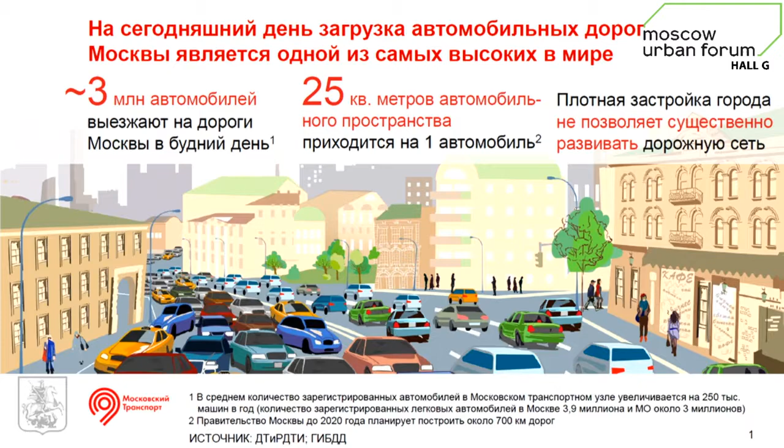And we have 3.9 million registered cars in Moscow. In addition, in Moscow region, we have 3 million cars registered. And we need to sum up these indicators, because we have a kind of unified transportation agglomeration. So I believe we have around 7 million private cars. We are not talking about trucks and lorries. And these are the cars which travel along Moscow streets every day. And this is an issue which we can resolve only jointly. This year, the number of private cars increased by another 250,000, and I believe that in the crisis period, the number of cars will not become less. People continue buying cars, and by the year 2020, we will have another 1.5 million cars in this city. And probably you are aware of the opinion of certain experts.

500,000 cars can be a comfortable limit for Moscow. If we have 500,000 cars on the streets, it will be quite good. Currently we have around 3 million cars, and 7 million private cars are registered in Moscow, and we will add another 1.5 million cars which will be purchased by Muscovites in the coming years.

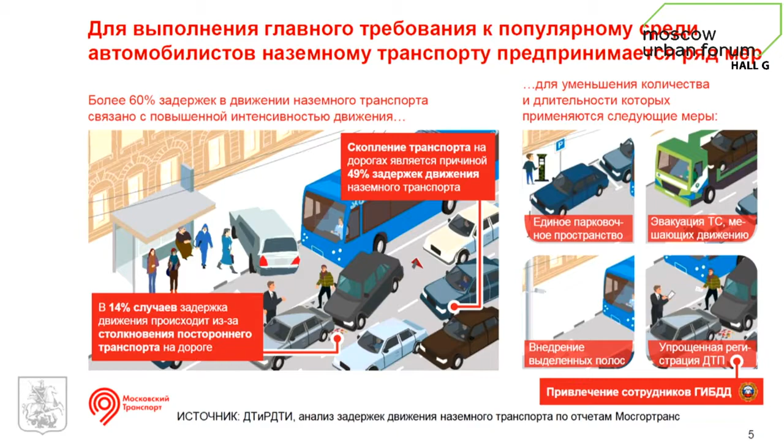Now we are trying to introduce a European protocol for resolving these accidents, but still only 1% of motorists use these protocols, and therefore we need to state it is not that popular, or it is not feasible probably, and our goal is to make it more commonly used.

So what measures are we taking to make public transportation work better and to alleviate the life of our motorists? We arranged what we call a unified parking area and dedicated lanes on roads, simplified registration of traffic accidents, and attracting the public, the traffic police, quicker to the place of an accident.

And now I would like to speak about some additional efforts which we are going to undertake: optimizing or streamlining the traffic network, introducing a rapid bus system, and future development of parking lots and parking areas in Moscow.

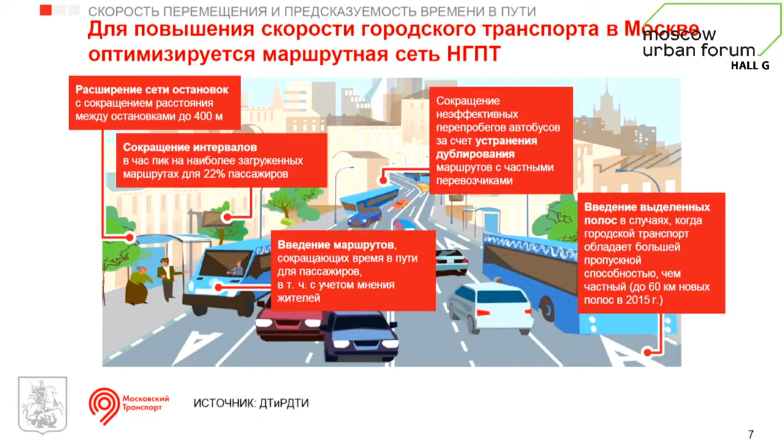What will be the benefit for the passenger? There will be more traffic stops, each of the stops will be longer on the roads, up to 400 meters, and the intervals between public transportation buses will be shortened. The same concerns streetcars or tramways.

We will remove this duplication of routes. We will introduce 60 kilometers of dedicated lanes for buses, in addition to the 15 kilometers we have now.

And we will continuously, daily improve the route system in response to the needs of the population, by their request.

We will have a unified city ticket, and there will be no other tariffs or rates of other prices. We will not have the route minibuses which are completely disorganized these days.

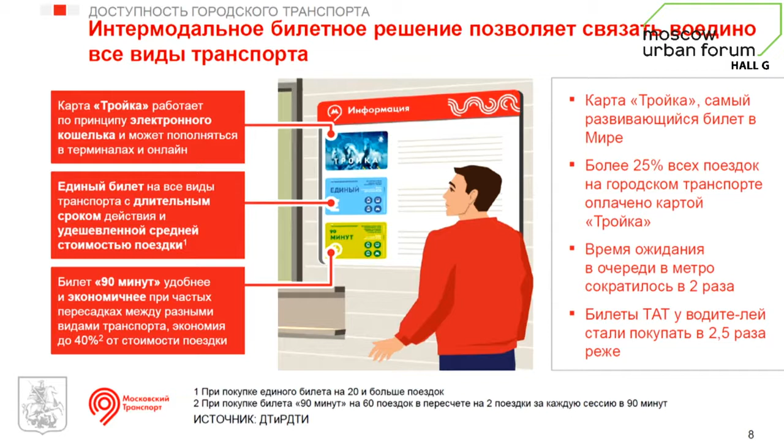These are our ticket solutions. As I said, our Troika transportation card is the most quickly developing ticket system in the world. We introduced it quite recently, and 25% of all trips on public transportation, 4 million rides, are paid by these Troika cards. By introducing this intermodal ticket, the number of lines reduced 2 times, and people buy much fewer tickets these days.

We also did our best to constrain the growth of prices on public transportation tickets. The mayor was very consistent there, and it will not exceed inflation. This is the commitment of the mayor of the city, so nobody should expect that one day prices will just skyrocket.

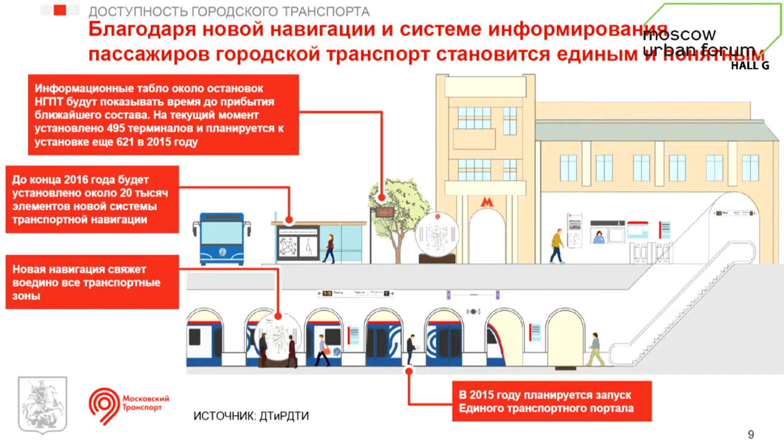Another thing to talk about is city navigation. Thanks to companies like Yandex and others which develop our signage system, city navigation has become transparent and easy. We have 495 displays in the city which indicate the time remaining to the next bus or tramway.

Another 600 displays will also be erected at the bus stops, and this makes life much easier. We will have more than 20,000 elements of transport navigation installed across the city next year.

In 2015, at the very beginning of the year, we will launch a unified transportation portal where we will have all services available, and it will also be a very good platform for communication for Muscovites on issues of public transportation.

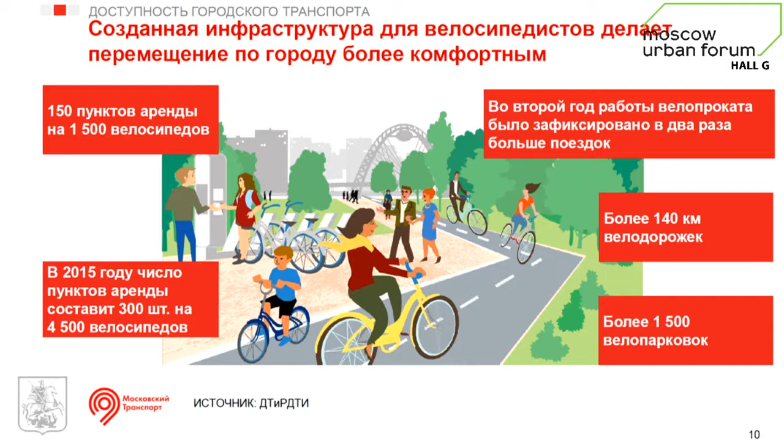As for bicycles, last year we started paid bicycle rides in Moscow, and the number of city bicycles increased in 6 months by 200%. We also increased the number of renting places, and thanks to development of bicycle lanes and the efforts of the Moscow government, bicycles gained in popularity and the attitude of people has changed.

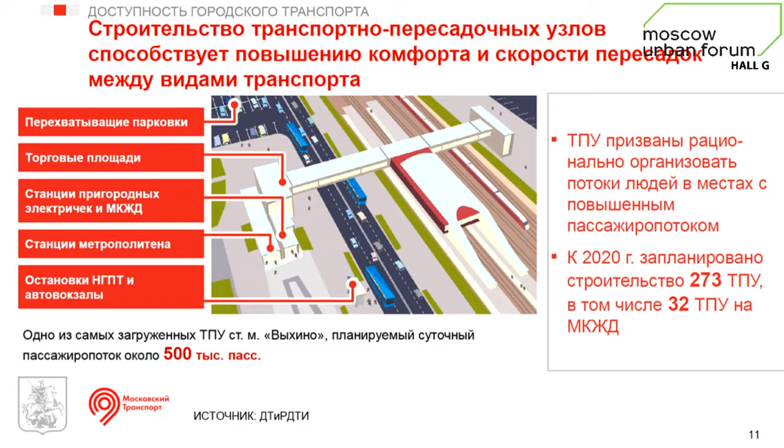People, out of just leisure trips, now also use bicycle rides for business purposes.

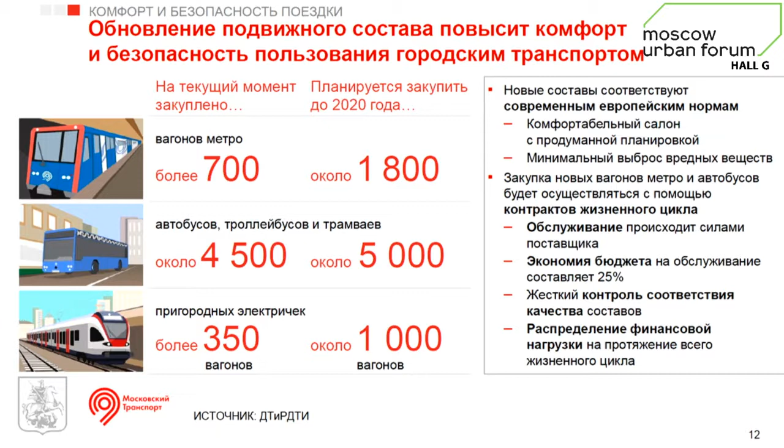And we introduce the economy of the life cycle for this public transportation. It actually saves costs for the city budget, and this is a new model.

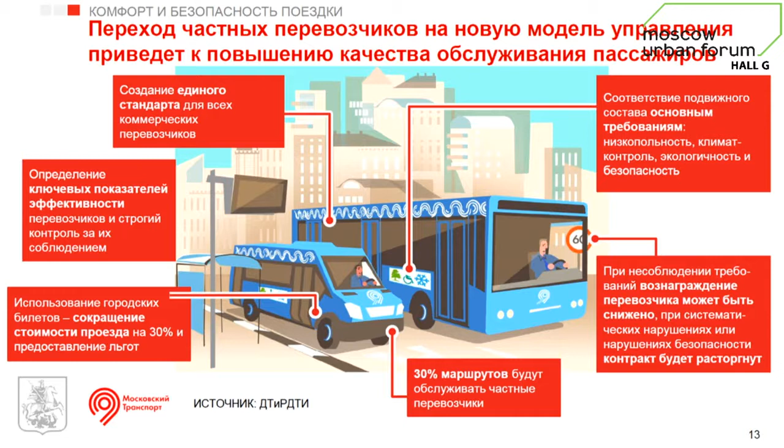Our goal, which I explained, is to attract private business to this segment, and companies which want to have clear rules and conditions for the services they provide for Moscow passengers.

As for taxis, when we started in 2011, we believed that only by 2020 would we have 45,000 legal taxi cars, but we overdid it already. We have more than that, and we believe we will add another 7,000 in 2015.

So our basic goal these days is to make public transportation quick, understandable, and easy to use. Many things can only be tackled through continuous contact and interaction with Muscovites, those who live in this city. In 2015, my major goal is to establish a clear and understandable dialogue with citizens of the city. We believe these challenges are important for millions of people, and we are creating a bridge between our plans and the needs of the population, so we can address them in a concerted manner.

The last figure I would like to mention: 90,000 Muscovites and citizens of the Moscow region work in the transportation sector. It's a tremendous number of people, human capital which we need to reckon with. We need to provide good working conditions for them and improve their skills, and this is what we will also implement next year.

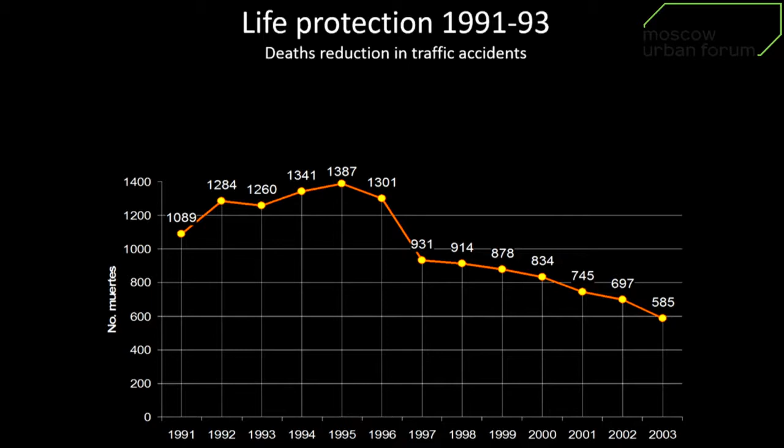We also had prohibition of drinking after 1 o'clock in the morning in public spaces. It was called the carrot law; to be carrot in Colombia is to be self-controlled, not drinking too much. That helped, along with the change of police, and seat belts. After one year of government, 70% of people used seat belts, and at the end of that first term, it was more than 90%.

We had also other technical things like medicalized cars for getting quickly to the accident place. Well, there is a metro discussion, old at least 40 years.

We have defended with Mayor Peñalosa the option of BRT, bus mass transport system. A lot of ideas come from the metro, but it's a lot less expensive. For Colombian economy, we could have one line of metro instead of having 6 or 7 lines of Transmilenio.

There is a dedicated way for the bus. There are stations. You pay and register in the station, not in the bus, and people get out and get in very quickly. The bus is very reliable in terms of time, it gets precision, but it's not very comfortable. You have people stuck, especially in rush hours.

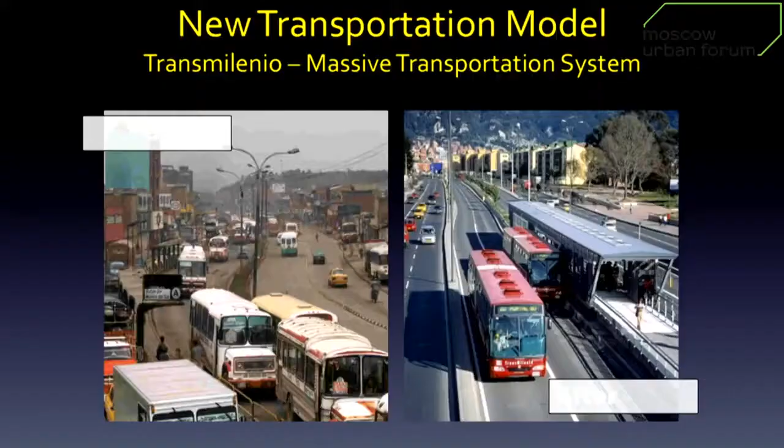Well, this is an illustration of the change. We have paths for bikes.

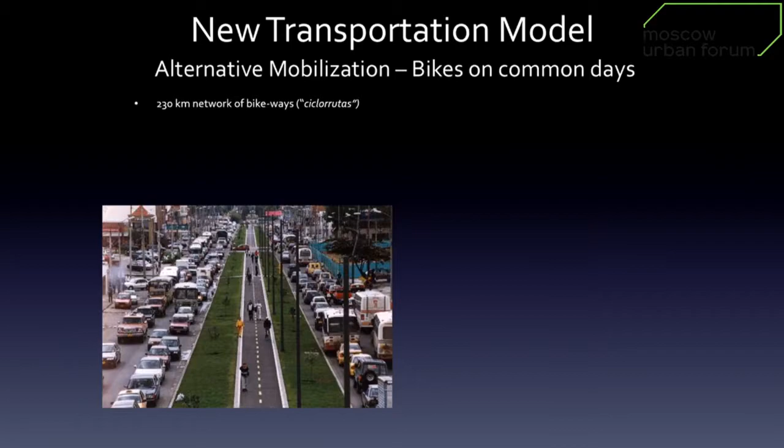These guys didn't expect much things from the bike. Bogota has an ideal topography for biking, but has perhaps a little too much rain. But the Holland ambassador was going with an umbrella and inviting me to learn to use an umbrella on bikes.

We have a lot of use on Sundays and on days without work. More than 1 million people go on bikes in the streets, but it's sport. We need to change people's behavior to use bikes during the work week.

These are some illustrations. There are cultural problems with using bikes on work days. Sweating is one of them. People should want to take a new dress after biking to work. Universities are strongly committed to the use of bikes.

Well, in this moment, we have a car restriction of 50%, two hours in the morning and two hours in the afternoon. 50% of cars have to stop.

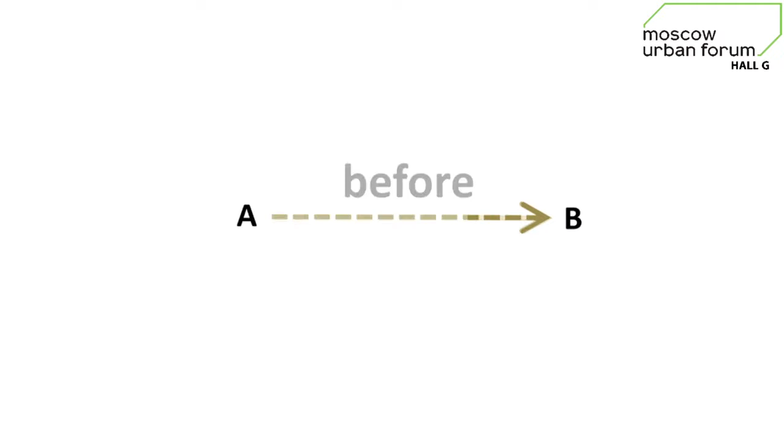In my opinion, and in general, in the way we observe cities as transport consultants, first of all, I would like to say that in the old time, going from A to B was basically an issue of only 2 functions. This is a great PowerPoint effect that I just created. Basically, the issue was about going from A to B, and the 2 variables were time and money. The only 2 elements of concern were how do I move around, how do I plan transport. I just do it through understanding how much money it will cost and how much time it will take.

It was a very functional approach to transport, but now things have profoundly changed, and we kind of start understanding the very strong implication that decisions that revolve around transport have on our cities. And therefore, transport in a way is becoming more complex, is becoming much more of an issue about planning and how a city operates.

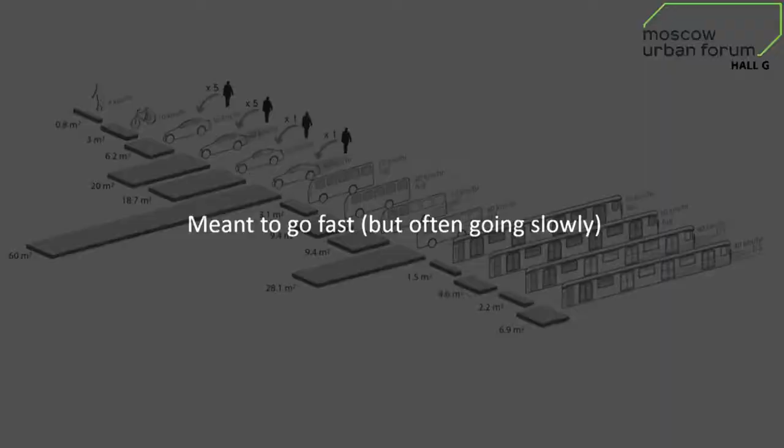So, very quickly, I don't want to talk about the externalities of the car. This is about the space requirements for different modes of transport, coming from the John Whitelegg book. It basically shows that if you're moving by car, solo driving at around 40 kilometers per hour, you occupy about 60 square meters of public space. Clearly, cars are kind of intense space eaters systems compared to public transport.

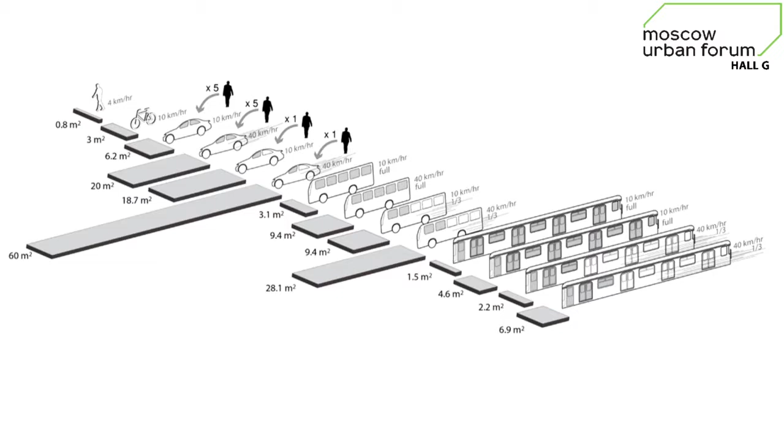And this is one of the reasons why they actually create troubles in cities. But this has been said a lot of times, it's all kind of nearly boring because you always see it.

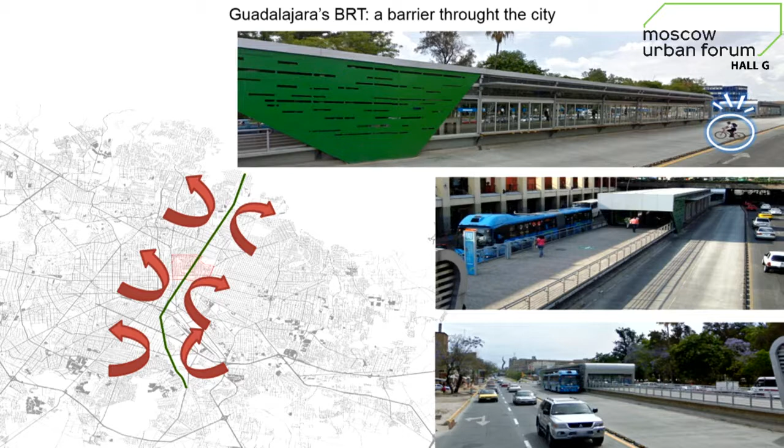I also would like to say that very often, though, when you want to go from A to B fast, even in public transport, you might generate some problems with the city. This is a project in Guadalajara where we are working at the moment. And when I went to see this BRT system, I was surprised to see how it was actually designed to provide very fast connectivity through the city, but as a result, it created a massive cut.

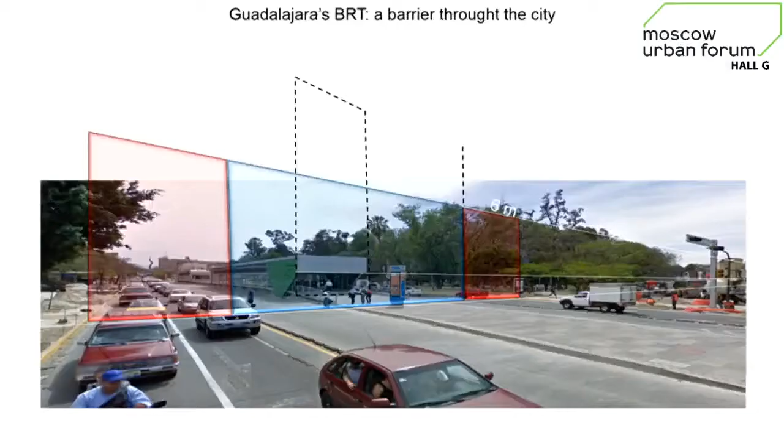So if you're going from A to B fast, regardless what means of transport you're looking at, you kind of compromise the quality of a city. And in that sense, you can see the impact on the city fabric.

So this is Moscow, and what we see here is the isochrones, how far you go in a unit of time. This is about 55 minutes from the Red Square by car in a kind of free flow condition, basically without congestion on the streets.

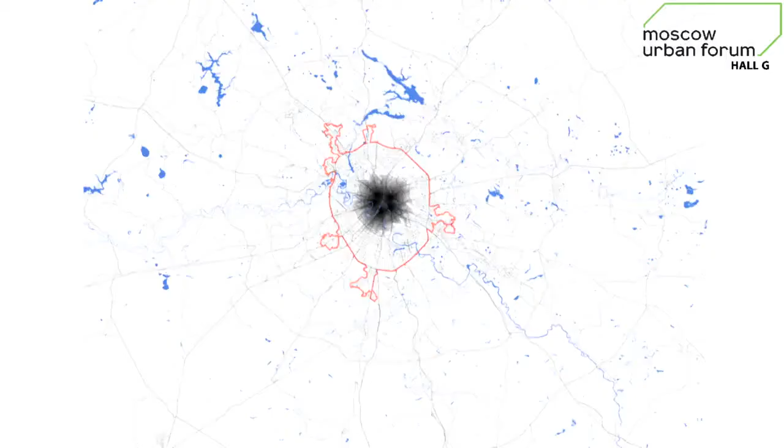And what you see here is starting from exactly the same distance, it's how far you go if you walk. It kind of gives you the sense of the difference between the two modes of transport, but also you kind of understand that cars are such a fundamental issue in contemporary cities that it's very difficult to think they will kind of go away as a means of transport.

They will stay, definitely, as Mr. Lizzotto was suggesting, with revised densities. Now, this kind of approach to cities has generated some issues.

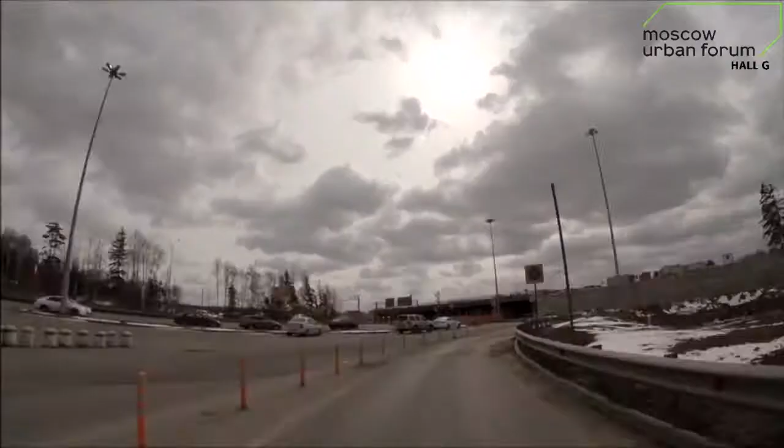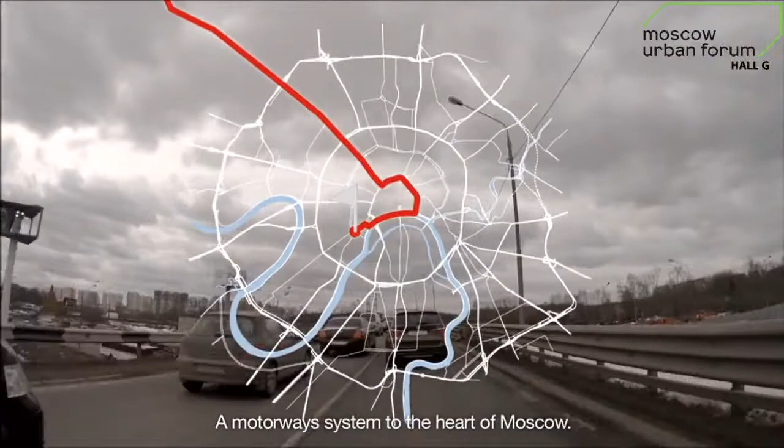This is a quick video, but I don't know if we still have time to show it. But basically, this is a video that we've done of coming from the airport into town. And it's actually interesting because you see the way the roads were planned up to, say, 10 years ago, and the impact on the city functioning.

And I think this is a kind of interesting analysis because it kind of shows that as you are outside the city, you have a kind of strong express system that bisects into the suburban areas. But what is also interesting about Moscow is that this kind of approach has been then taken into

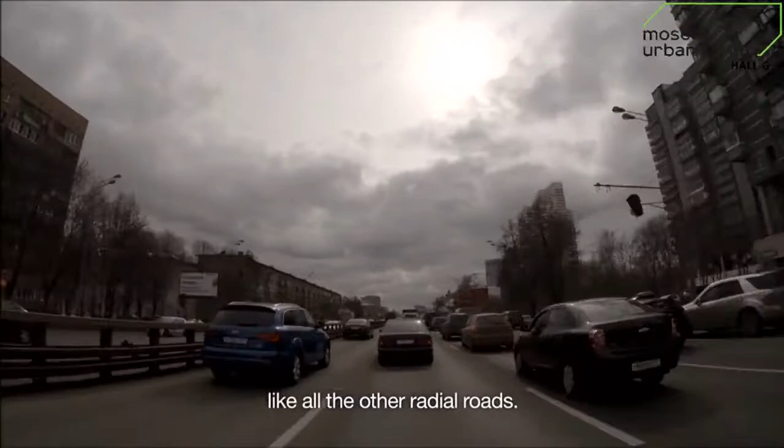the city itself. And when you are outside of the city, you tend to go on split levels or underpass. As you step into the city itself, you start going into a one-way system, with left turn maneuvers restricted. What is interesting about this path, which is basically a radial system that takes you down into the heart of the city, is that you have only 6 points of crossing at grade, which is clearly an issue.

When you start thinking, which is the topic I'm going to go into very soon, of sustainable mobility, of non-motorized transport, of bicycles, of pedestrians. When you see this kind of approach, it then penetrates throughout the city into the very heart of it, and it becomes a system that basically bisects the city in two.

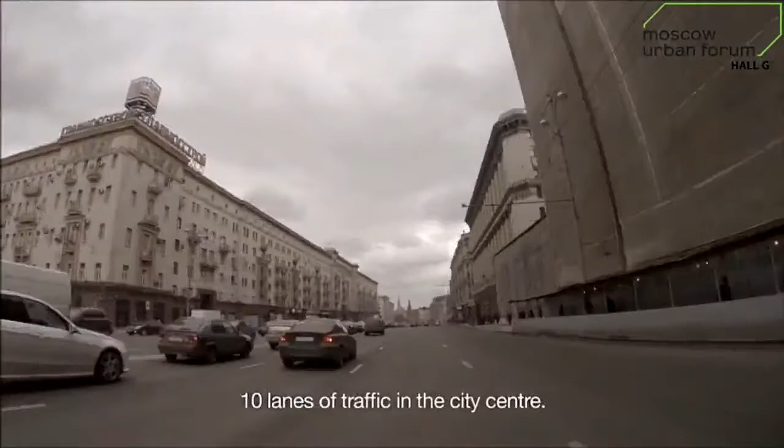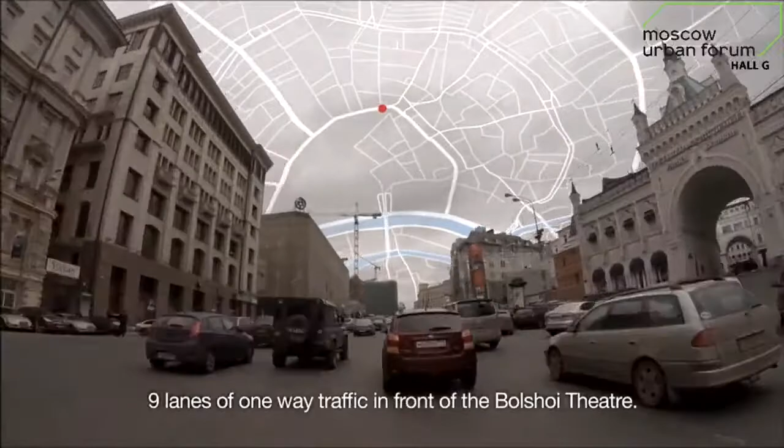Here, for instance, are the distances between the different stops. And then as we move into the city, we reach the Kremlin, and I think it's actually also very interesting because in the 80s, this system was revised. It used to be a two-way system, and again, with the idea of creating express movement in town, a single one-way loop has been generated.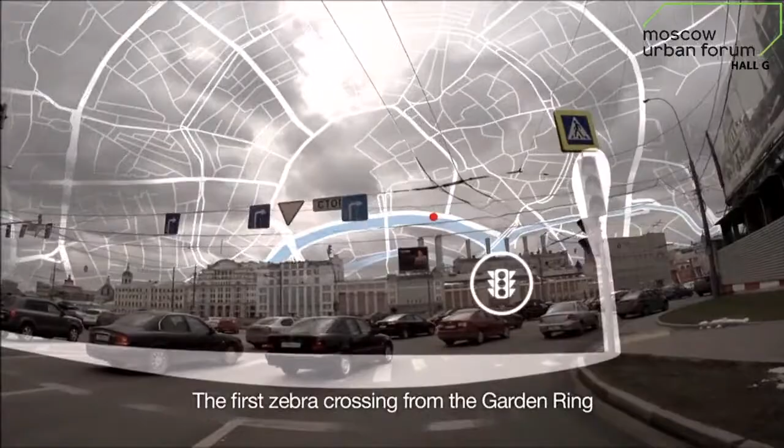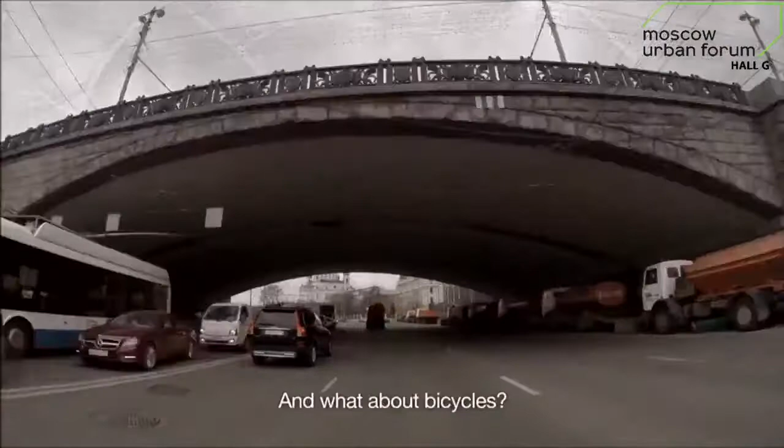So you now have 6, 7, 8, 9 lanes in front of the Bolshoi of one-way loop, and that was planned only with the idea of creating express movement from A to B into the city of Moscow. And I do believe that we have to start thinking or rethinking about these sort of solutions that have been deployed with this framework of going from A to B without really thinking on the impact on the surrounding roads.

And then if you look at, this is a great slide by Luca Guala, a friend of mine. Basically what you see in the three topics on the top right is that it's about non-transport use, so modal shares, modal mix. It's about pedestrian, public transport. The priorities have been inverted. And if you look at the three, four topics of the new priority, you see that all of those are revolving around sustainable mobility, about pedestrians, about bicycles.

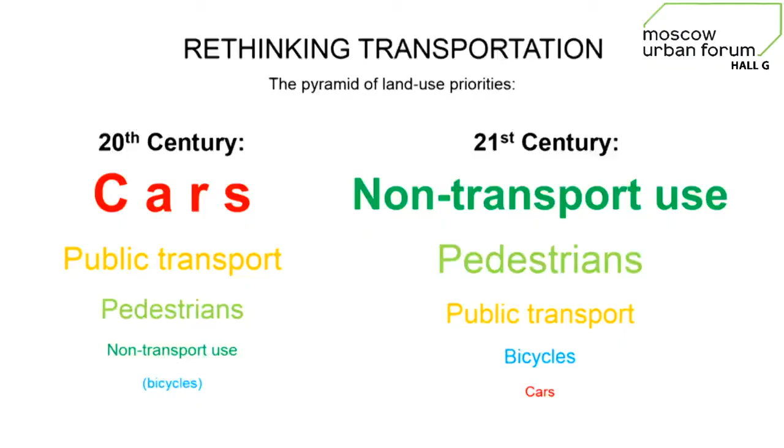We have to think that pedestrians in cities and bicycles in cities are modes of transport which have to be nourished, which are as important as the car. And so we have to start thinking the infrastructure addressing these new priorities. And we have to think about the street as a holistic system in which there is not the typical split of elements with architects, landscape, transport engineering. We have to start thinking holistically of the street as a public space, which takes space for movement, but is also a public space in itself.

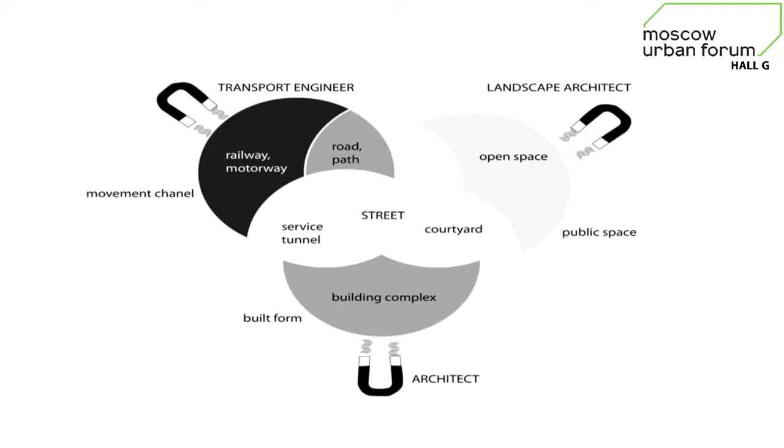This is a project that we've done recently in the heart of Moscow. How long do I have?

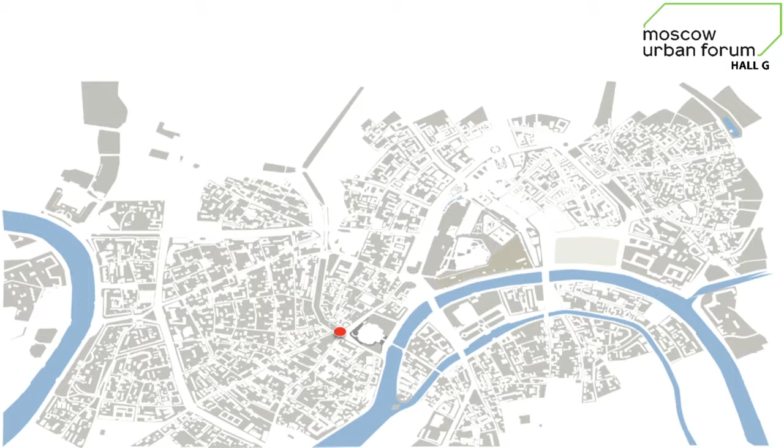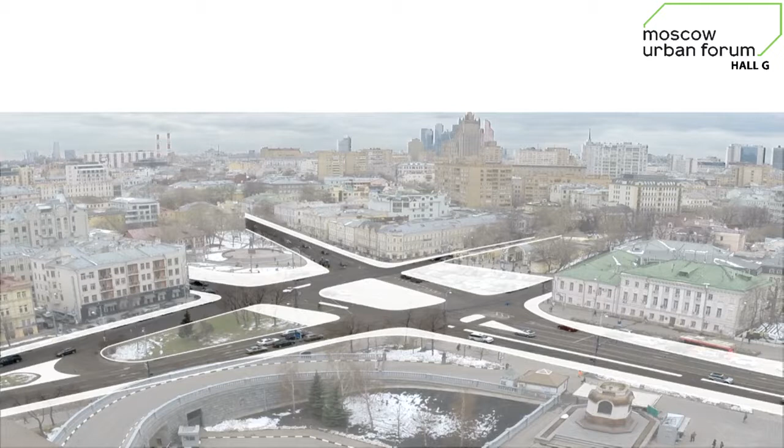Yes. In the heart of Moscow, this is in front of Christ the Savior. The idea here was to say, let's look at this road, this part of town, but how do I do if I am a pedestrian? If I'm a pedestrian, I actually have to circumnavigate with excruciatingly long waiting times at the junction. It makes it so inconvenient. And if you look at the street itself, it can be revised, readjusted, and the space can be redistributed in order to create a permeability which is not there at the moment.

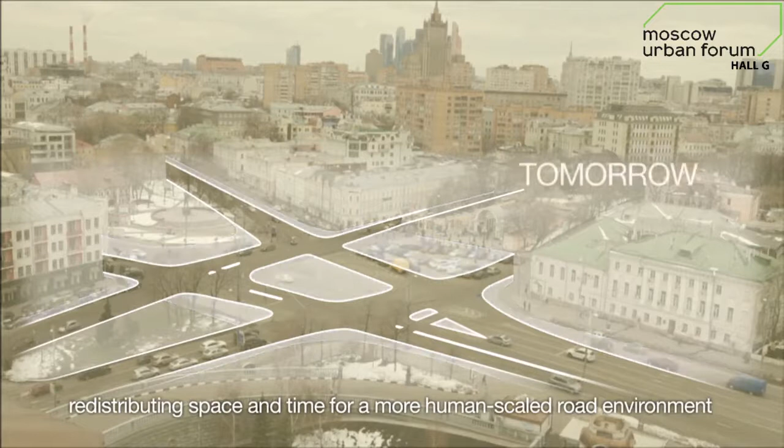And I show you here the other video. This is a picture taken from Christ the Savior. Here we are showing how, by taking what is there, we can change it into something dramatically different. Permeability, the ability to go through space with all different modes of transport, is super important. The space as it is done now is profoundly against permeability at grade, and we think that this can be revised. We can redistribute the space without compromising the traffic.

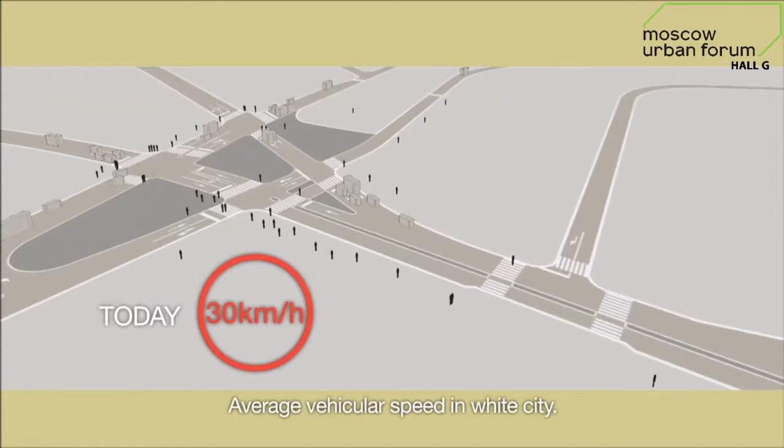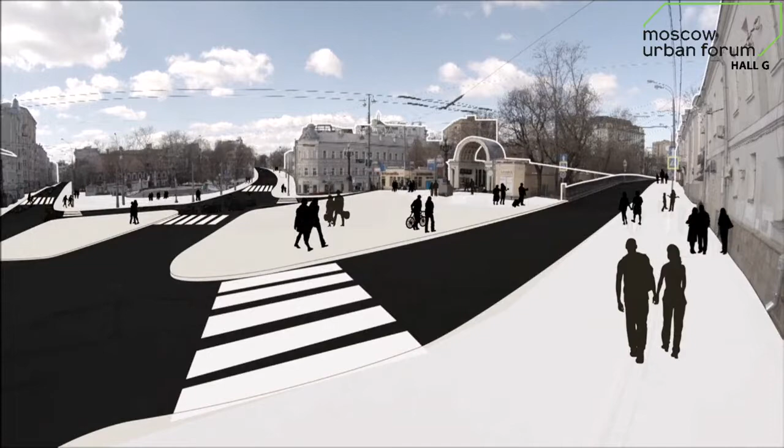We've done a vast amount of surveys and simulation, and the idea was, we can take exactly what is there in terms of traffic flows, which has on the simulation model an average traveling speed of 30 kilometers, and change it, redistributing the space, giving permeability to pedestrians on the junction without compromising the traveling speed. So if you start looking with a new mindset, rebalancing these components in which pedestrian and bicycle become a fundamental element, you can take those spaces, generate public space, and make it very attractive without compromising the traffic flows.

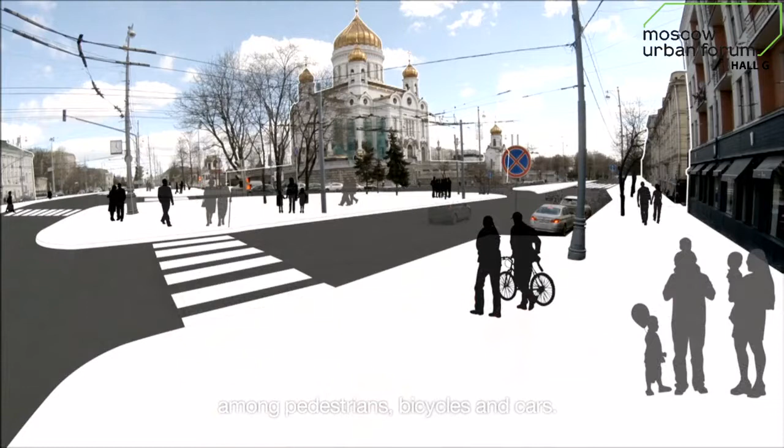There is the possibility of changing the existing patterns without having an impact on the existing traffic volumes. Often streets are longer and bigger than required. One minute and I'm done.

I just wanted to say a very quick word on the last project that we're working on, which is the pedestrian and bicycle master plan. We are in the process of working on this. It's a great team. We are working with the Institute, Moscow Transmit Project, with Rosinak & Partner from Austria, and with a great team from the DOT, a young, enthusiastic group of people that every city would envy.

And this is the map of the car crashes involving pedestrians in Moscow, as provided by the police. I think this will be one of the main topics of the plan. It's not just about creating an environment for pedestrians and bicycles, but we also want to drastically enhance the safety of streets. Thank you.

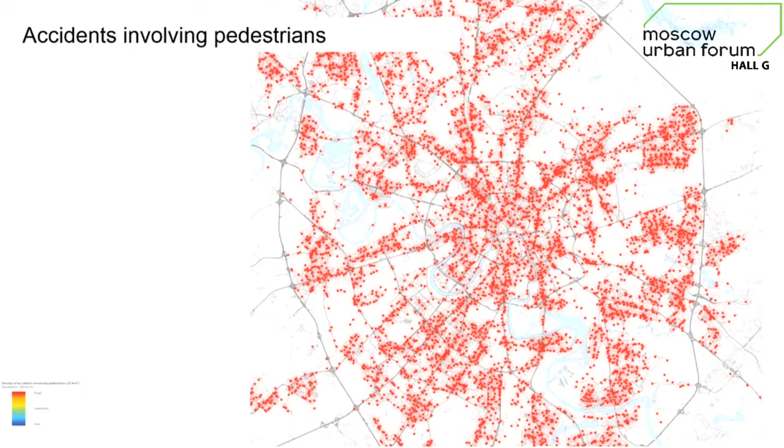Thank you, Federico. And Mr. Parolotto has pointed out a very important thing. The 20th century was the century of cars. It started in 1908 when mass production of cars at Ford's factory started, and now it is coming to an end. It is really important to hear this statement from somebody from Milano, which is the most motorized city in Western Europe. Please take notice of it.

And our next speaker is Michael Rawlinson, the design director of City ID. Mike, you're welcome. Got 10 minutes? Just about. I'm going to go quickly, going to show you a lot of images. I'm delighted to be here, and this is a fantastic project. I think it's a transformational project for the city, in fact.

So without further ado, I'm going to talk about how we improve people's perception and image of Moscow by designing information services that make sense to them. How can we make the network, the spaghetti of transport, easy to read and easy to understand? And that's a challenge. It's a very important challenge, because we won't get patronage into public transport, we won't change modal shift, unless we introduce the idea of quality and the idea of the user into the experience of using transport systems.

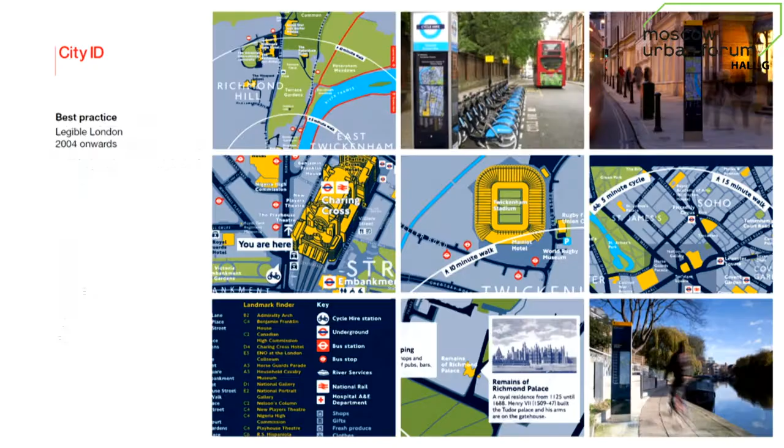Okay. We've got a great team. Again, we're working with DOT and others. We're also working with Billings-Jackson Design on this project, and we've been working on it now for approximately 18 months. A couple of images of best practice. What we're doing in Moscow isn't necessarily unique, though the scale of what we're doing here probably outstrips any other project in the world at this current time.

London, Legible London, started back in 2004 and started to integrate for the public various modes of transport by designing an identity that pulls together the different parts of the experience. And it's been very successful. It has 1 billion users a year. It's changing patronage in the way transport is being used in that city. It spans bike share to walking systems in particular.

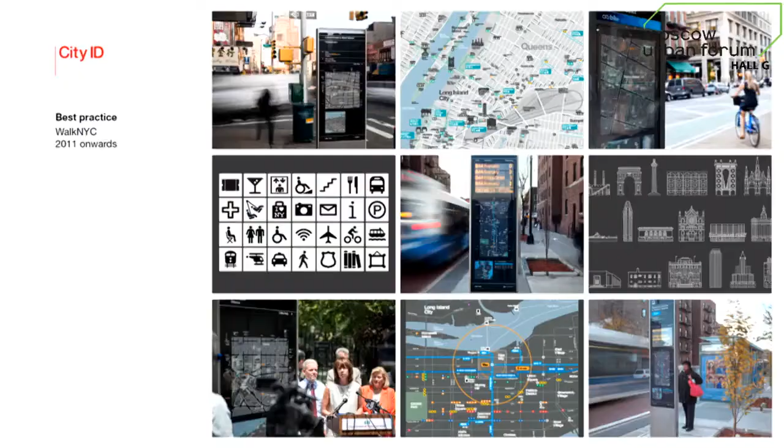New York is going even further. We're lead designers on a project called WalkNYC. We've been working there for 3 years now. And we've seen the rollout of a new information identity across a whole host of projects, from subway to bus rapid transit to walking to bike share. And now we're seeing it roll out to ferry systems as well.

Now, the important thing: behind all of this sits an impressive database and cartographic engine that drives hundreds and thousands of different outputs every year. And it's really important. Moscow kind of needs to do the same, needs to learn from that. Working too well? Okay, on to Moscow again.

Okay, the problem with Moscow is that Moscow has sort of grown over time, and all the various elements that make up your journey experience have never been co-planned or co-designed in the right way. It needs hoovering up, it needs cleaning up, and needs to be expressed in a way that speaks of this city, not somewhere else. So these things have not been provided with a duty of care. They're not necessarily well maintained. There's a real opportunity to start to link together visually the way information is provided to people.

So what we're trying to do in introducing this navigation system is actually introduce something that's better than best practice, that focuses on people, that relates to the whole journey from pre-arrival, what you do online or on the mobile site, right the way through to looking at every mode and stitching those together using various different media. And lastly, doing it in a way, it's like designing with a recipe, linking it together through a visual language. Putting people at the heart to tie together all those various modes.

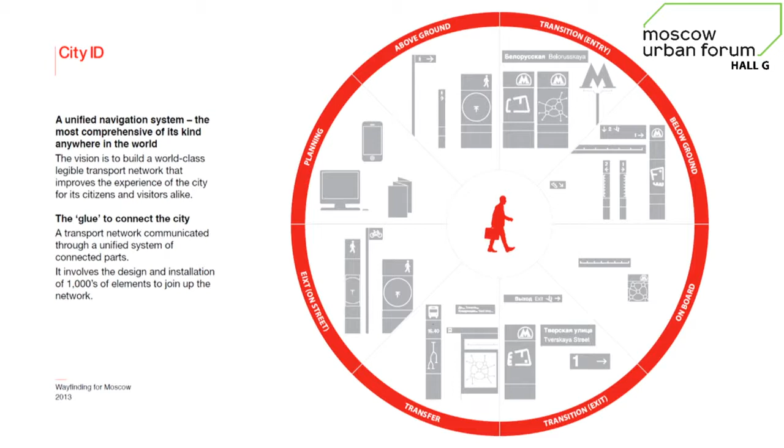We're all pedestrians. We don't just use the bus. We are a pedestrian when we board and when we exit the bus. We need information at both ends of that journey experience to make it connected. Similarly with the metro systems, similarly with the bus systems and trolleybus. So what we need to do is design a range of elements that work across those journey stages, from planning your journey at home right the way through to your destination and back again. It's really crucial. So we see this as a kind of a curatorial role, linking together the journey experience for people. Okay.

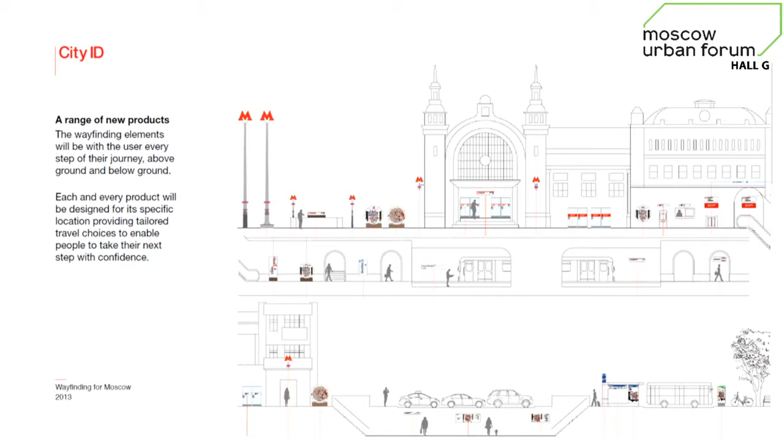There are thousands and thousands of points of touch in a journey. They're like photographs that go off in your head, from looking at points of arrival to what's on a platform, to where I get off, to actually on the buses or trams or metro cars themselves. And we need to design each of these particular points in a certain way to bring them together.

And we've done some early concept work that starts to think about the function and utility of information, how it's designed for people, linking it together. And we've moved on from that now to start to think about a visual identity for the city. For the first time, Moscow has its own typeface designed by A2 with Ilya Ruderman. And it will be part and parcel of the future city's DNA.

We've also worked on pictogram design. Again, they're all bespoke and unique to Moscow for all sorts of different services. Not just for transport, but potentially for tourism, for culture, and other areas as well. Moving on further, we've designed a mapping system, and this is in its infancy. It's an early system at the moment, but it's a beautiful system.

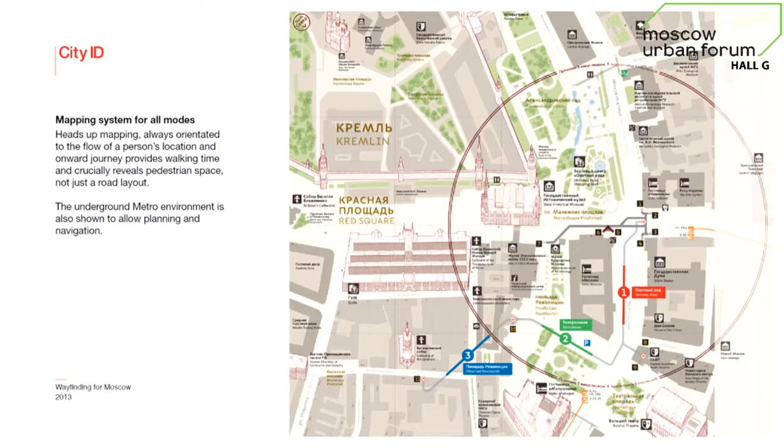It relates to the pedestrian. It includes features and facilities that people, when they're in environments, can actually use. They're all designed in a way as well that's heads up. As you look at them, it presents the view that you see in front of you. It's obvious. Moving on, they contain illustrations to help you reference yourself in public space. We've looked at them from an ergonomic, a legibility point of view to ensure that the products are very readable and very easy to use.

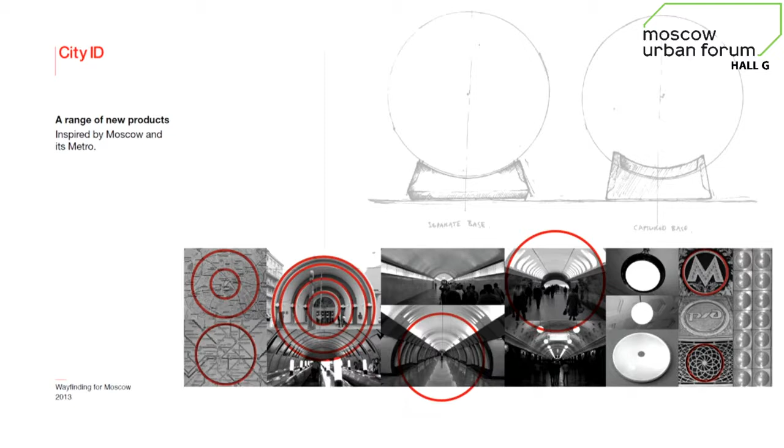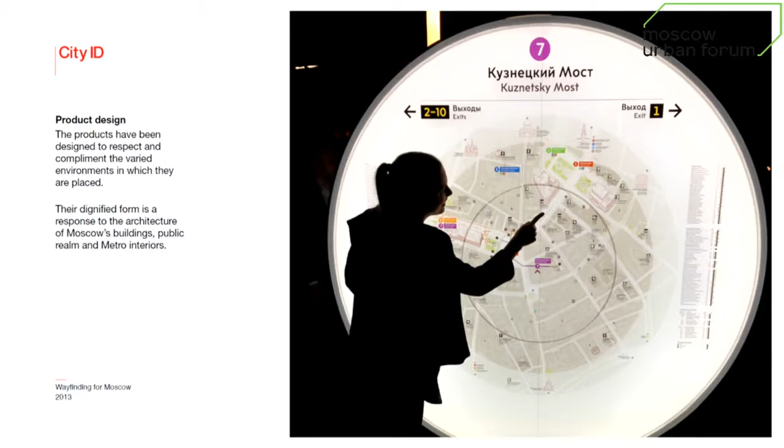And we've also related it to Moscow itself and the beauty and expression of its circular forms and detail. And this has become a key part of the visual language as we've moved forward. And these are some of the early prototypes that are being developed, and one or two of these have now gone into the city. And I'll show you a few others. They're designed in a way that ensures ease of read for different users, whether they're in wheelchairs or standing, and at certain distances. And they've been prototyped.

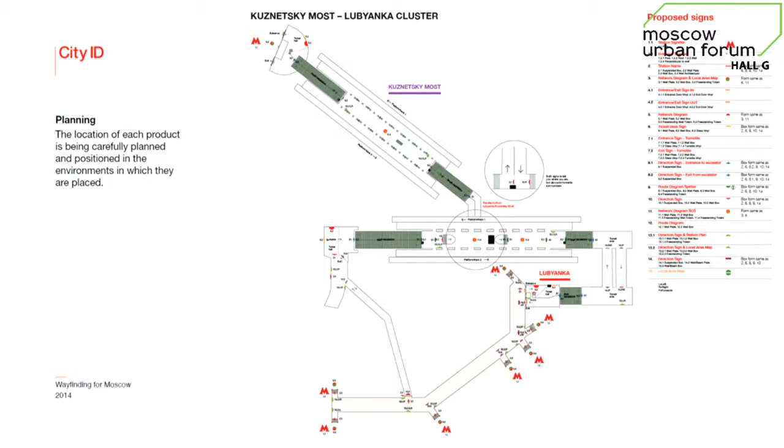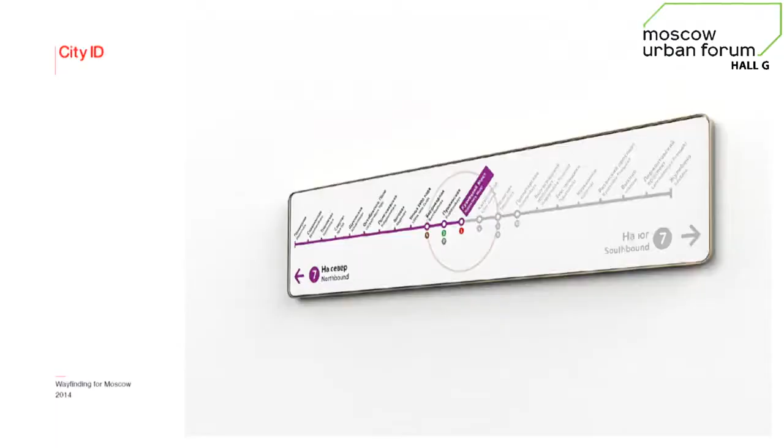We're planning each and every station environment and looking where the products will be located. It moves on. And these are a few examples. I'm going to go through these quite quickly. So direction information. Colour coding, ease of reference, a clear hierarchy of information. As you move into the platforms, given direction information through route maps and diagrams, in each case always forward-facing or heads-up to give you the direction you need to move in, around metro lines, and as you exit, giving you information as pedestrians to use as well.

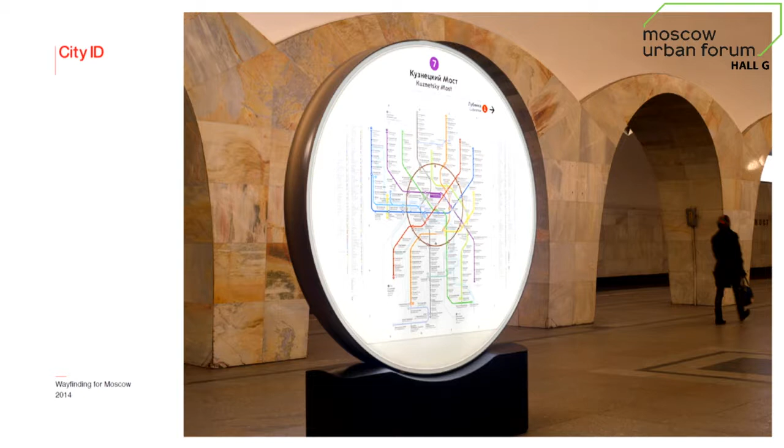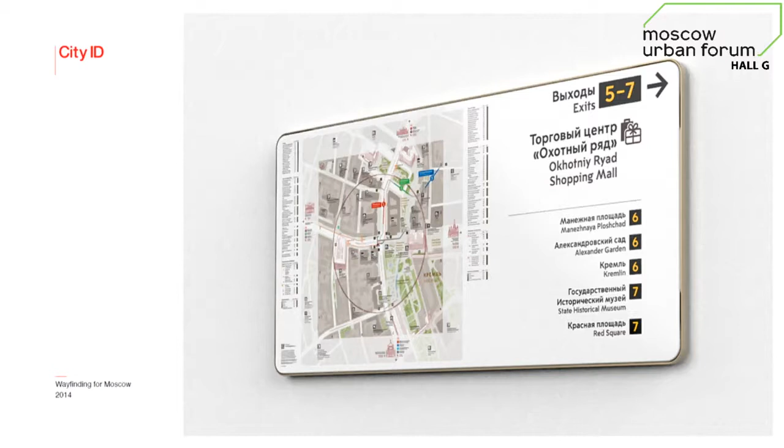So move along. And also the network itself, the actual metro network. Beautiful refined products, very high quality materials. Something that people will actually go and use and engage in is really important here. Beautiful forms, very sculptural, relating to the Moscow M in its design, but also including very functional information such as exit information. You can see here, into subways and underpasses. So stitching together all your journey stages through information. In a way, the system is your friend. That's the way we want to design it, that it's there when you need it.

This isn't moving for some reason. It doesn't want to wayfind, it doesn't want to navigate. There you go.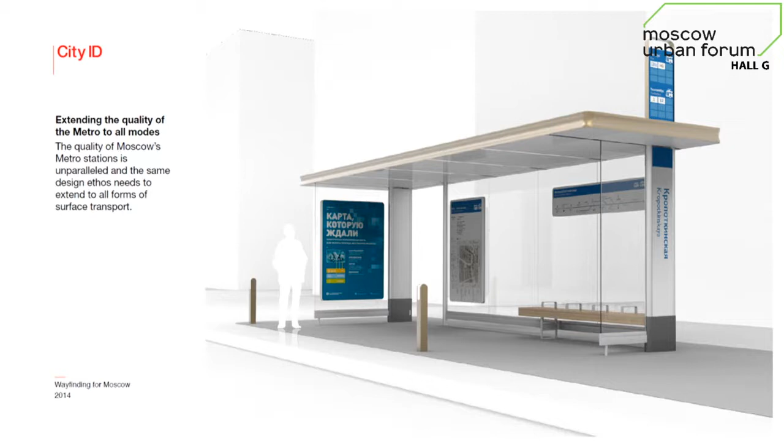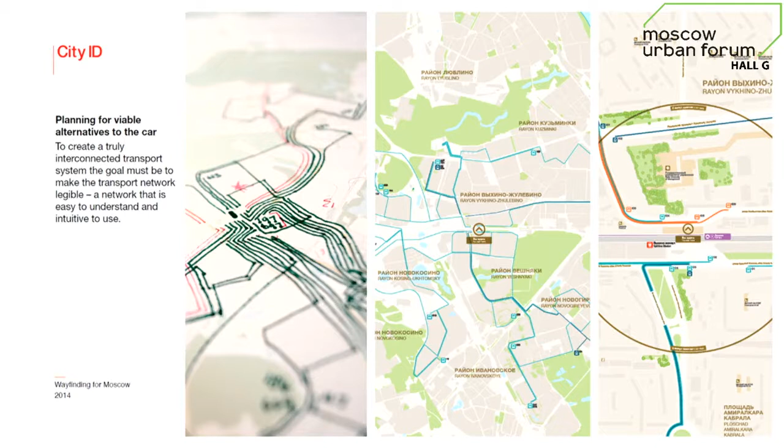And then outside. So we're also designing the system to work outside in the streets and spaces as well. And not just that, building on Federico's point about rebalancing streets and spaces, there's a huge opportunity to bring some of the quality of the metro system outdoors and into the streets and spaces itself, and to design beautiful products and services for bus, trolleybus and tram users, for bike share, all part of a consistent system for the city. But it needs careful network planning. Spaces do need to be rebalanced, and we need to simplify people's mental map and image of how to use transport.

7 key points: put people first, plan in the round, co-plan, co-design and deliver. Stick to your vision and values. Design in a way that speaks of this city rather than somewhere else, and make it seamless. Connect every point of your journey. Build the resources behind it so it can populate and grow as your transport system changes. And invest once and wisely.

This type of product brings a return on investment, probably higher than any road scheme or any other major infrastructure project. It's good value for money. Moscow should carry on doing it.

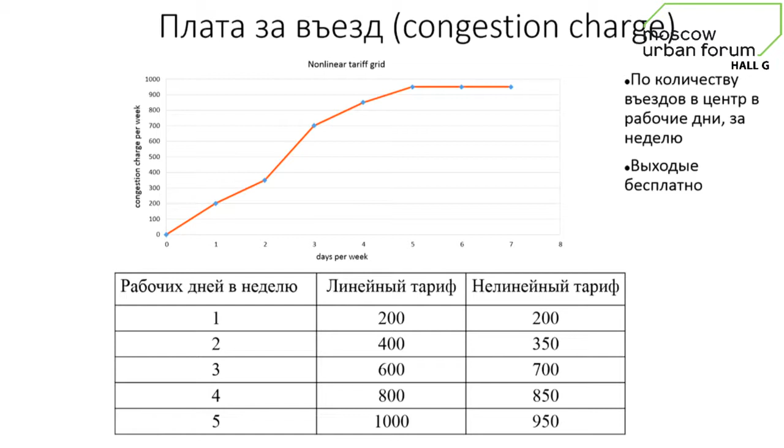If you need to come to the center of the city, you should feel that you actually benefit from paying, because we pay, but we gain several rights in the city. If you come five days a week with a linear tariff, it shouldn't be linear — 200 rubles for one day, 400 for two days. Instead, there should be a cheap price for the first and second day, a more expensive price for the third, and then discounts on the fourth and fifth days. This means people will have to choose whether to use their private car one or two days a week, or consider other options.

But you see, by implementing this kind of measure, we get the picture shown on the right-hand side, representing the number of rides you take. If you have a linear dependency, then you don't get this self-regulation effect.

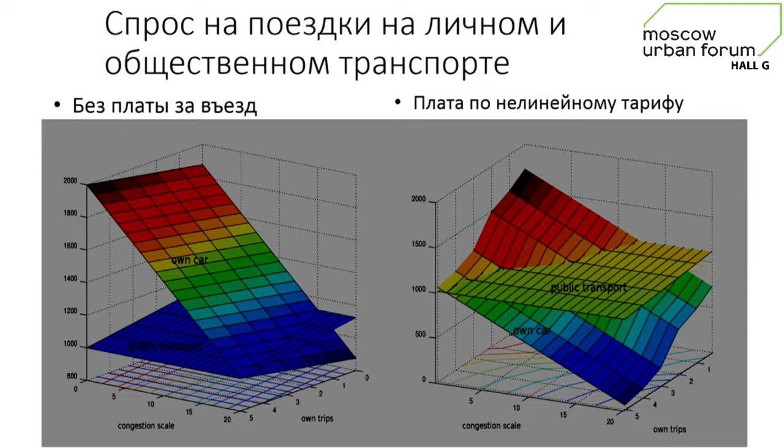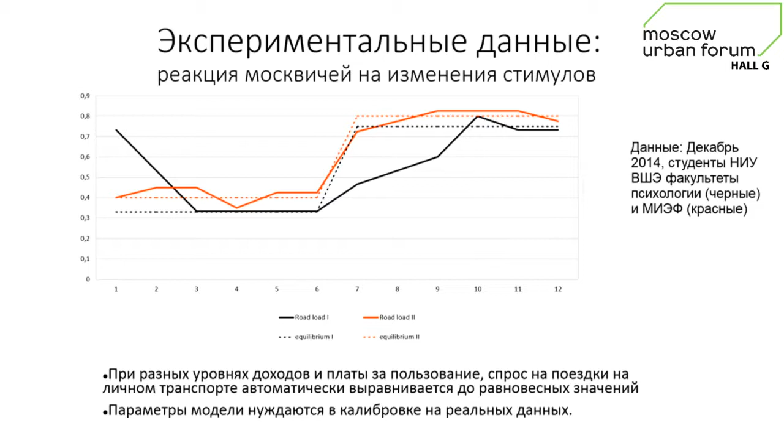But if you have this kind of options, then we have a reduced number of traffic jams. And we did the tests for it. We understand that the time is short, but it works. We did testing of this idea with certain people, and the respondents were quite happy about it, and they understood the message of the authorities. So, Evgeny, whatever we do from the viewpoint of carrot and stick, you will be distributing carrots, and all these solutions like paid parking and fees to enter the city, it will be all your burden, right?

Can you carry it? That's a very good question, because 80% of the rides is what we lost passengers for public transportation, and it is also related to the load on roads. If we don't have free lanes for buses, we cannot resolve the major challenge. This challenge is dominant: the time to wait for the next bus, and a guaranteed time for the ride. We're not talking about speed, but predictability. Even if it is slow, if you know it's 5 or 7 minutes, it's better than if it may be 2 minutes or 20.

Therefore, these displays at the bus stops, Wi-Fi inside, and some additional services actually alleviate this kind of waiting time and anxiety of people. By 80%, we resolve these people from just wasting time, and at the same time we get rid of this excessive number of cars in the streets.